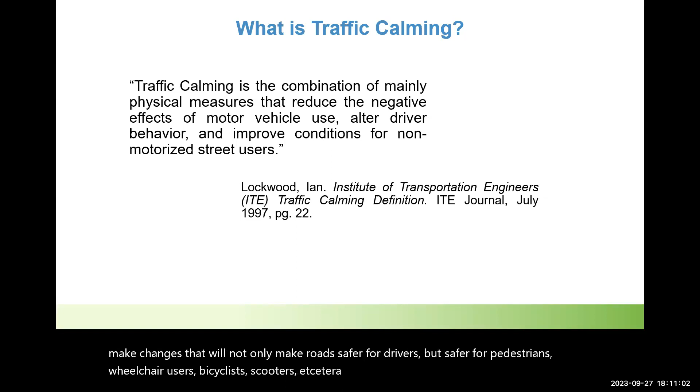Traffic calming isn't by any means a new concept. There are tons of examples all across the US, all across the world, and tons of examples in Ann Arbor — we'll show a lot of them in the slides later on. But specifically, the traffic calming program in Ann Arbor is designed to provide residents with a formal process for engaging with the city in a partnership to perform a technical analysis of traffic concerns on local streets and to explore potential solutions using the fundamentals of traffic calming.

It's a 5-step program. Wade Trim is currently assisting with step 2 through a portion of step 5. I will briefly describe each step, but there's a guidebook available online that has all the details if you have anything you want to review after the meeting.

Step 1 started with one of your neighbors acting as a petitioner who submitted a request to the traffic calming program for Bird Road between Newport Road and Huron River Drive. After defining that project area, the petitioner gathered signatures from other residents who also live within the limits.

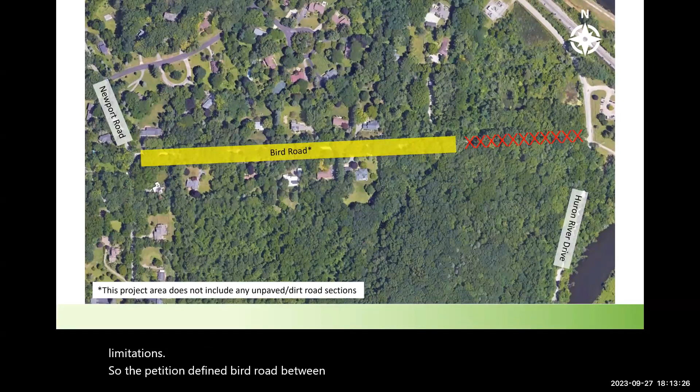I want to pause here to make sure everyone is aware of the project area limitations. The petition defined Bird Road between Newport Road and Huron River to be considered for traffic calming, but the program guide requires the existing road to be paved before any devices can be placed. So we're unable to propose changes on the portion of Bird Road that is dirt. The approximate area is shown on the map here with a red X, where the road is currently unpaved. This segment won't be part of our traffic calming discussion.

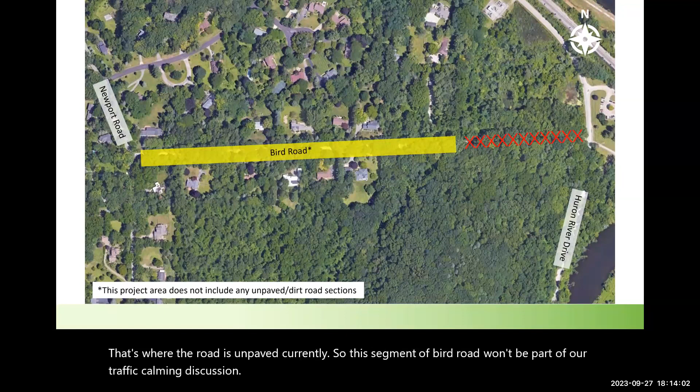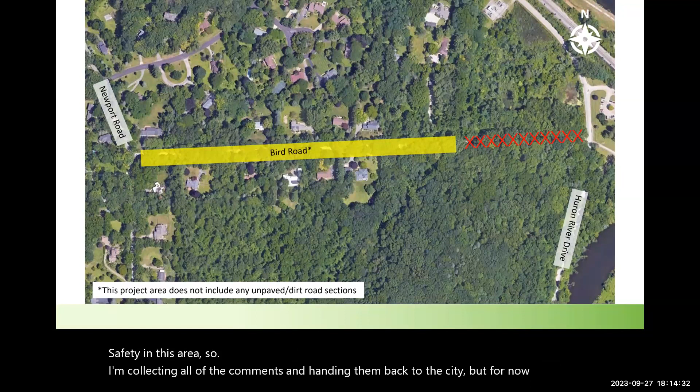There have already been a number of safety concerns in this area, even prior to traffic calming, especially at the hill right before the parking area for the nature preserve. Since Wade Trim took over this portion, we've been getting comments about safety here. I'm collecting all the comments and handing them back to the city, but for now I'll keep our focus on what the traffic calming project can address. At the end of the meeting we'll discuss any additional resources the city has.

So step 2, that's where we came in. Wade Trim sent out mailers with an initial questionnaire to all project area residents to gather feedback, specific concerns you might have, and what experiences you might have previously had with traffic calming.

The requirement for us to continue to step 3 was that at least 50% of those who participated in the questionnaire must support the project moving forward. Of the questionnaire responses we received, 82% were in favor. There's a detailed summary of the initial questionnaire on the project website.

In general, results of the initial questionnaire indicated that speeding and poor sight distances were common concerns. The starred locations show where frequent crossings are observed. Again, the map is showing only the paved portion of Bird Road. The unpaved segment between the hill by the nature area and Huron River Drive isn't currently eligible for improvements through the traffic calming program, but we'll save that discussion for the end of the meeting if there are questions.

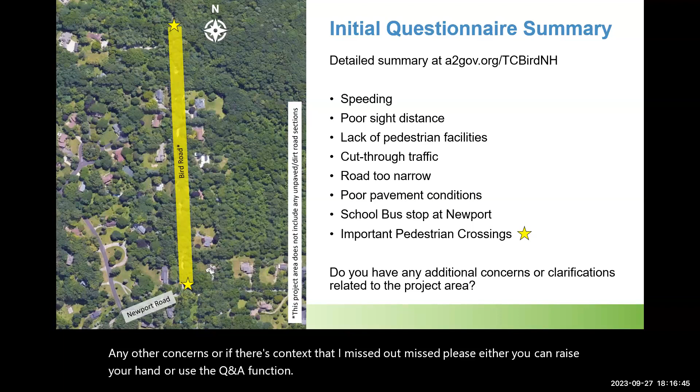I did get a question: is the lack of sidewalk considered? It'll be on one of the later slides as well, but the traffic calming program does not install new sidewalks, and won't install new sidewalk ramp connections either. The city does have a separate program for sidewalks, but the traffic calming program would not be able to put sidewalks in. This entire stretch doesn't have any pedestrian facilities, which was another big and frequent comment in the questionnaire.

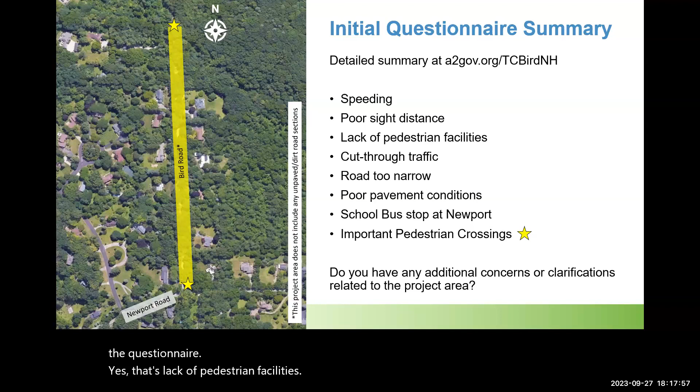Okay, don't see anything else. So step 3 is where we are today, and it's where most of our focus will be for the rest of the meeting.

Before I present the starter idea, we'll go through an overview of the device toolbox described in the guidebook. Before we do that, I'll launch another poll to check if people are familiar with the guidebook, in case they didn't get a chance to look at it. When we mailed the questionnaire out, you received a copy of the guidebook, but it was a very small copy, not always the easiest to read. There was a QR code to get you to the website for the full version, but I know there's not always time for that.

I've got all the answers in, and it seems like everyone's already looked through it. There might be one or two people who are on the verge of skimming through it and needing a refresher. But this meeting is recorded, so we will go over it quickly to make sure anyone who goes back has an easy reference.

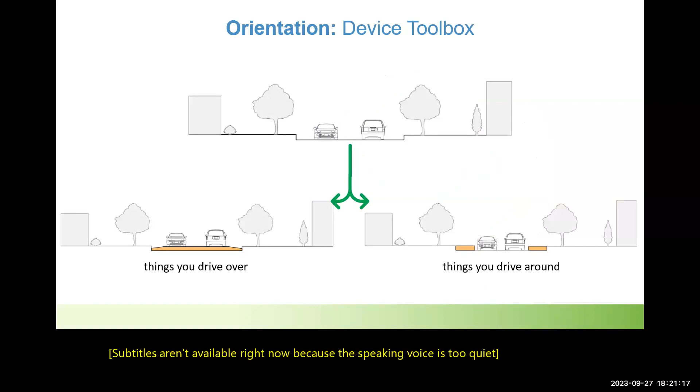On pages 9 through 12 of the traffic calming guidebook, devices are grouped into things you drive over and things you drive around. A disclaimer about this portion of the presentation: some devices in the guidebook are not covered tonight because they're not feasible for this project, either from an engineering perspective or they don't meet the Ann Arbor Fire Department's requirements for emergency access.

Things you drive over are devices that slow traffic by creating discomfort if traveled over at a speed exceeding 25 miles an hour. The device toolbox presents 4 devices that fall under this category, including speed humps, speed tables, raised crosswalks, and raised intersections.

The next few slides will describe each of these devices except for raised crosswalks and raised intersections. These devices are currently under review by the engineering department. They also don't apply with this project since we don't have any established crosswalks.

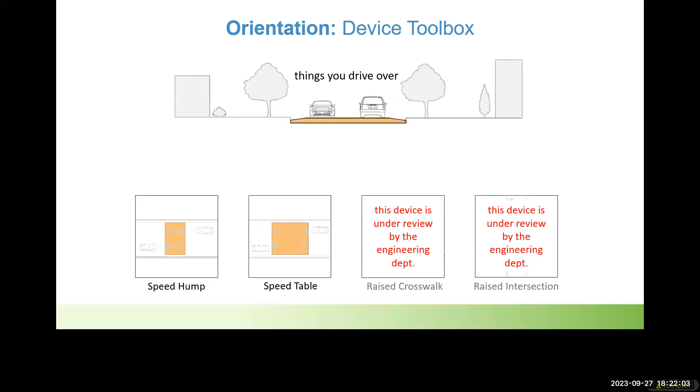Studies found benefits of speed hump treatments include speed reductions, traffic volume reductions, as well as crash reductions. Some other notes: the height is designed for ease of bike usage and bicycle safety. If previously permitted, vehicles can park on speed humps and trash cans can be placed on speed humps if necessary.

This is a speed table. You can see a fully constructed example on Glenwood Road near Washtenaw Avenue. Speed tables are raised devices that extend the full width of the street except for the gutter. They're typically 22 feet long with tapered edges, a flat 10-foot center platform, and are 3 inches high.

Studies found benefits of speed table treatments may include traffic volume reductions and crash reductions. Some other notes regarding speed tables: the speed reduction is less than the speed hump, the platform width can be customized, and the height is designed for ease of bike usage and bike safety. If previously permitted, vehicles can park on speed tables and trash cans can be placed on speed tables if necessary.

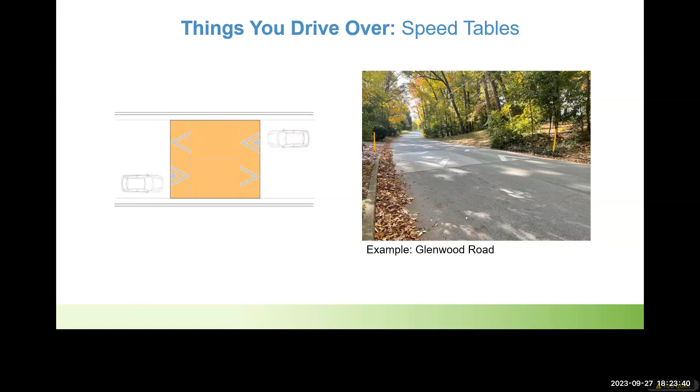If there are any questions about devices you drive over, please raise your hand or use the Q&A function. Okay, I'm not seeing any questions or hands.

Moving on to the other group of devices in our toolbox, the things you drive around. This type of device slows traffic by creating the perception of less room for error and a road that's visually or physically narrower. The device toolbox presents 7 devices that fall under this category: pedestrian gateways, median islands, pedestrian islands, residential traffic circles, mini roundabouts, curb extensions, and chicanes.

The next few slides will describe each of these devices except for the devices marked in red. These devices have been omitted from this project due to the street width requirements set by the fire department, as well as conflict with existing traffic controls.

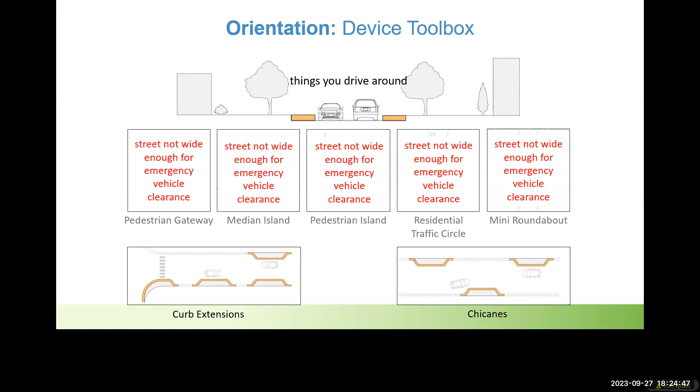Curb extensions can be used in several designs: curb bump outs, mid-block bump outs, and chokers. Shown on the right is a bump out at Granger Avenue and White Street. The curb extensions act as an extension of the curb.

Oh, sorry, I think we lost Lori. I'll go ahead and pick up.

Curb extensions act as an extension of the curb line to physically and visually tighten the corridor by narrowing street width. Two parallel curb bump outs can be used to create a single lane width passageway or choke point. You can alternate the curb bump outs to create a chicane effect.

Curb extensions have a couple of considerations: they may require drainage consideration, they may require loss of on-street parking, they can also cause debris to collect around the device, and they also have to maintain 20 feet for emergency response vehicles.

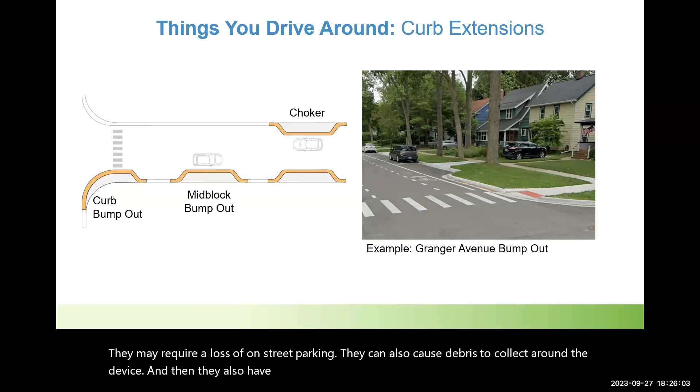If you're doing a 1 or 2 lane choker, this can result in speed reduction. It's shown to produce a minor reduction in traffic volume, and 1 lane chokers rely on regulatory signing and driver courtesy as well.

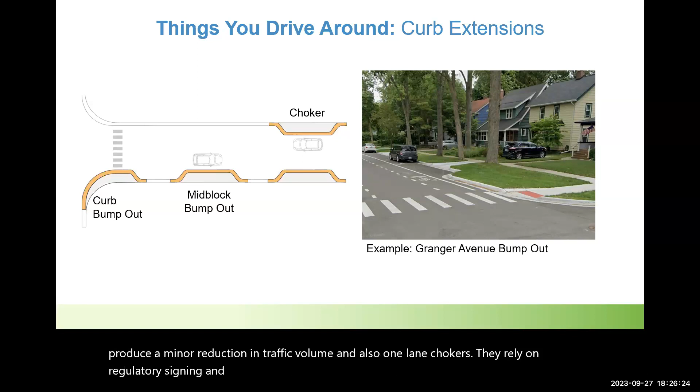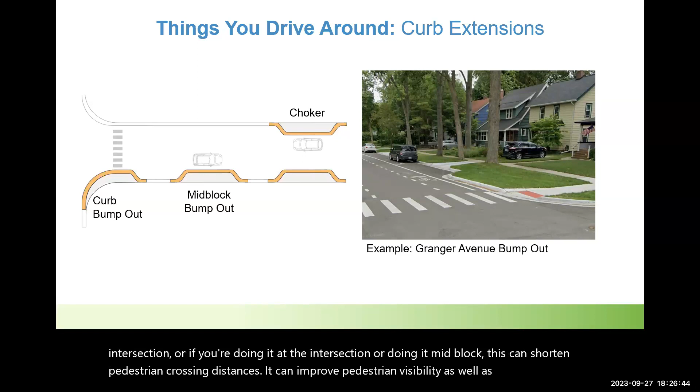Devices applied at intersection and mid-block locations. Whether at the intersection or mid-block, this can shorten pedestrian crossing distances. It can improve pedestrian visibility, as well as eliminate illegal parking if there was none permitted on the street.

This slide shows an example of alternating curb bump outs that create that chicane effect. Like other curb extensions, chicanes can require drainage consideration, loss of on-street parking, and cause debris to collect around the device. They must still maintain 20 feet of clearance on the road for emergency response vehicles.

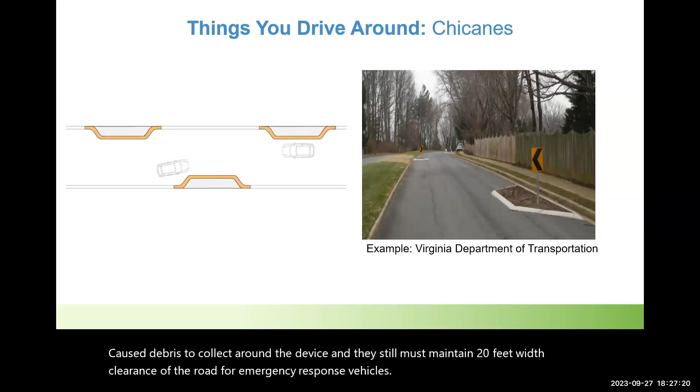There's one other device included in the guidebook that doesn't fall into the category of driving over or driving around. This is the neighborhood gateway treatment. It's a physical landmark that indicates a change from a higher speed arterial road to a lower speed residential or commercial district, like a sign saying you're coming into the neighborhood.

Neighborhood gateway treatments can increase awareness for residential speeds. They may also require additional right-of-way. In addition, the neighborhood or any adjacent property owners would bear the landscaping, installation, and maintenance costs.

If there are any questions about the devices you drive around or the gateway treatment, we'll do another pause here. You can raise your hand or use the Q&A function.

Hi Christy, this is Cyrus. Oh hey Cyrus, sounds like just a few connection issues. I noticed I got a warning, and I think Lori might have hit an issue a bit ago. But the last bit you were explaining about that last device, the gateway treatment, it cut out for a second for me. I'm not sure if that's the case for everyone else, but just wanted to flag it in case it's my connection. Oh no, you're good, thank you. I appreciate that.

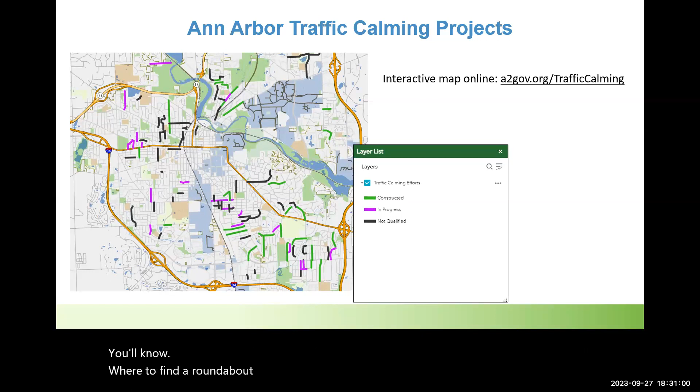There were examples of those devices in Ann Arbor next to all the device descriptions. If you'd like to see additional examples of how the devices are used, there's an interactive map on the traffic calming website showing past and current projects and where they are located, so you can even visit them in person to find a roundabout or a curb extension.

Next we'll present the starter idea, a draft plan created based on engineering judgment, data collection, the preliminary traffic study, and feedback from the initial questionnaire. There will be an opportunity to ask questions on each device and discuss any changes you'd like to see, keeping in mind this project is limited to the devices just reviewed, subject to additional design, and limited to only the paved portion of Bird Road.

So this is the starter idea. Again, this is just a draft created based on the information we've gathered so far, preliminary information, and the stuff from steps 1 and 2. We're proposing four devices for Bird Road. They're all speed humps, spaced to work together to create a traffic calming effect throughout the paved portion.

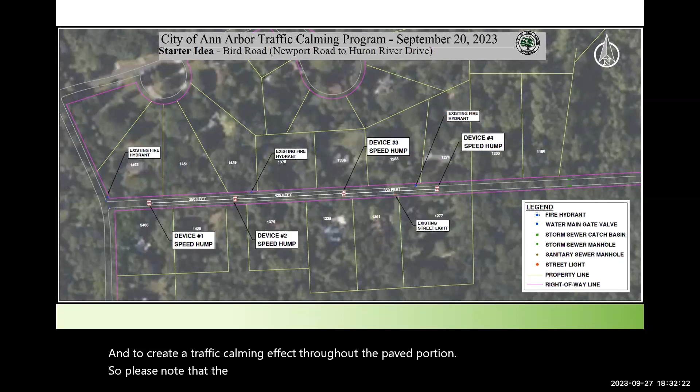Please note that the traffic calming guidebook states that the street must be paved to be considered for traffic calming. We've got about 2/3 of the road that we can work with between Newport and Huron River Drive.

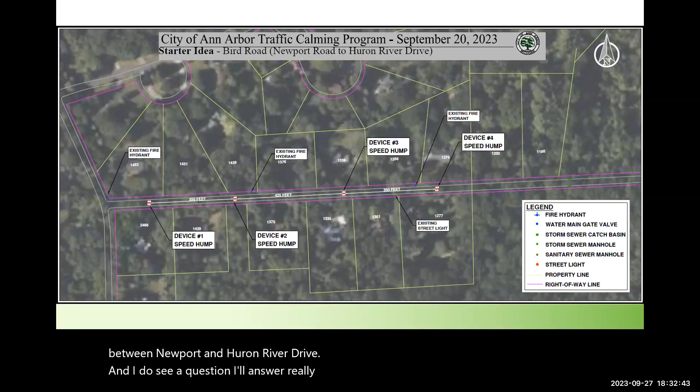I do see a question I'll answer really quick. There's a question about speed limit signs. Those unfortunately are not part of the traffic calming program, that's not something we can implement. Cyrus, correct me if I'm wrong, but I believe the city does not typically install new speed limit signs in residential areas.

Yes, that's correct. We can certainly take a look about if there is a lack of signage. What we've typically found in other locations is having some awareness of the speed limit is obviously important, but relying on signage alone is where the traffic calming program comes in, which is intended to create the slowing of traffic through a physical design change. It doesn't mean we can't install a speed limit sign if there isn't one on the block, for instance. But I believe there is, I'm just double checking. As long as there's some signage, that's generally sufficient.

What we're finding it can kind of— sorry Cyrus, you're coming in a little— is it breaking up a little bit? Yeah, okay. Can you hear me now? I think I'm good now. Sorry about that, yes I can hear you, okay. Lori, okay, I'll hand off to Lori then, because I think she'll reiterate what I was saying.

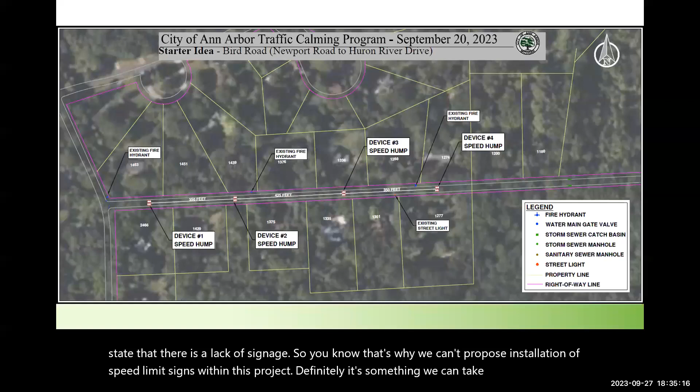Thanks, Lori. I already cleared it, I think, from the Q&A board, but they did state there is a lack of signage. So while we can't propose installation of speed limit signs within this project, definitely it's something we can take back to the city at large to review and determine whether the lack of signage itself needs to be addressed. I'll try one more time.

If hopefully this will come through. Can everyone hear me okay? Yeah, I can for now, yeah. Okay, just let me know if that's not the case.

So everything Christy and Lori said is correct. That being said, now that I've pulled the map up, I do see that we don't have signs, which may be a result of the fact that we don't have a good place to actually install them. I'll certainly work with our team to figure that out. As Christy said, it wouldn't be part of traffic calming per se, but having one set of signs on this block would certainly be a reasonable reminder of the speed limit. But we need to make sure that we can actually install the sign somewhere, given that there's no sidewalk and there may be limited ability for that.

Also just as a reminder, signage alone is typically not a solution. We don't rely on signage alone because we know, based on a number of studies on various types of behavior, not just speed limit, that installing a sign by itself is really just part of informing drivers and other users of the street about certain pieces of information. We would expect that if traffic calming were installed as part of this program, that would have a much more noticeable effect on bringing speeds down.

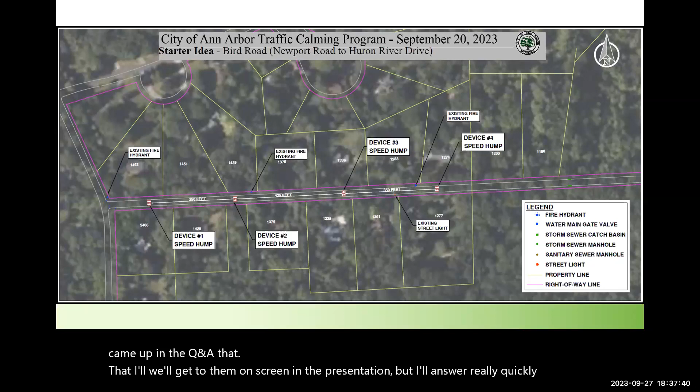Thanks, Cyrus. Yeah, so we'll definitely take that back for review outside of the program. There are a couple other questions that came up in the Q&A that we'll get to on screen in the presentation, but I'll answer really quickly. There's one from Nina asking if one of the speed humps looks like it's right in their driveway. Is that correct? This is just a very general overview, a very high level plan for you to look at.

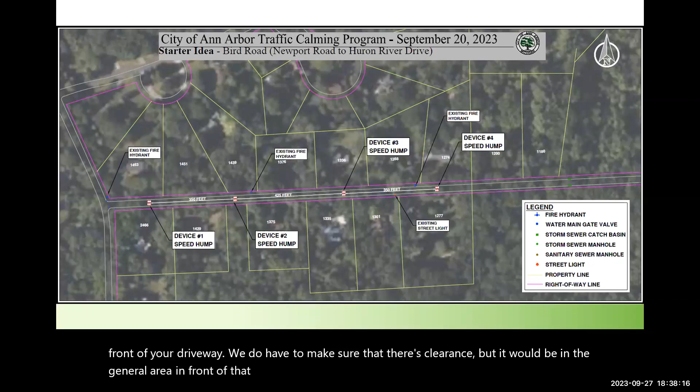I've already been out to Bird Road just to make sure we have the general spacing. It's not going to be right in front of your driveway. We do have to make sure there's clearance, but it would be in the general area in front of your address.

The other question that was added: what information do you have regarding sound issues and speed humps? Trucks barrel down this road at a high speed and wake me up at night. Would the humps make it worse? If you're speeding over the humps, I believe that would definitely create sound. That may end up being an issue of enforcement, which is something the police department can address, and I have more information on that later in the presentation.

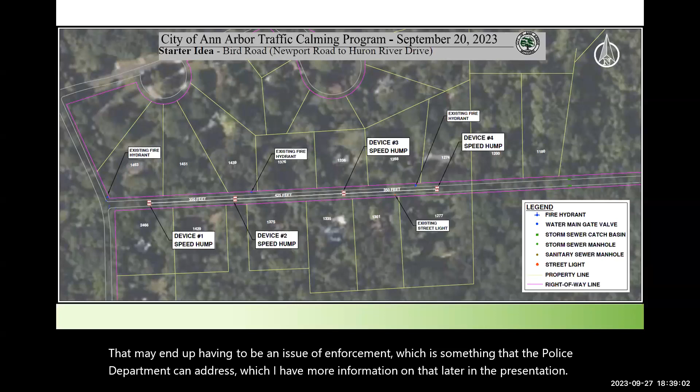One thing with speed humps and trucks is that it's going to be hard for them to continue speeding over them. Trucks in general are just kind of noisy. This question came up in another one of our meetings too, and so far the city hasn't heard any complaints of it increasing the speed or the noise levels. That's correct, Cyrus? Yes, that's right, we have not heard that. But you're right, and you and Christy are both correct to note there could be a sound issue if vehicles continue going over them at higher speeds than designed. But we have not heard of that as an issue after project installations.

One last comment came in before I go on, noting that the fire hydrant near 1274 is marked incorrectly, that it should be within the property line of 1274, so we will adjust that. Like I said, it's a very high level drawing that you're looking at. That is important to note.

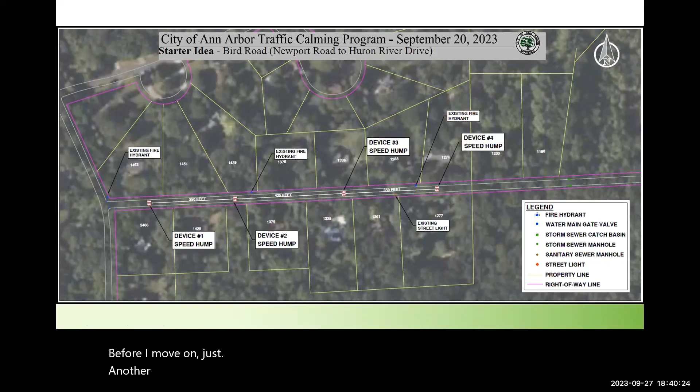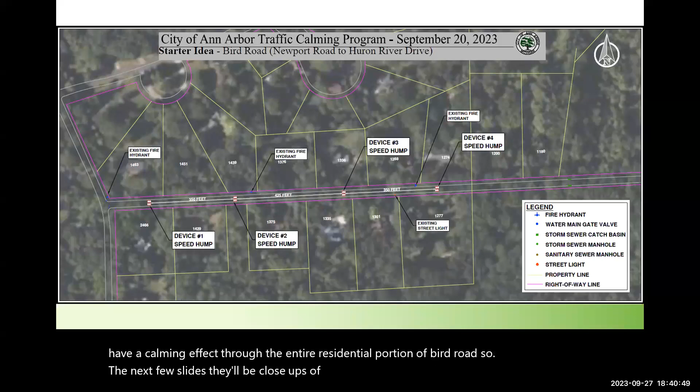Before I move on, just another reminder about speed humps. Speed humps, raised devices or traffic calming devices in general, are most effective when used in a series. We wanted to use this as a starting point. A layout like this is nice because it shows you can have a calming effect through the entire residential portion of Bird Road. So the next few slides will be close-ups of each device, just blowing up the image in smaller portions for you to look at. It's a very high level drawing, it's not going to have all the details as they would in the final engineering or construction plan, but just forewarning you, because they're all speed humps, the next few slides might get a little repetitive. This image here is just a little too far zoomed out to see some of the detail.

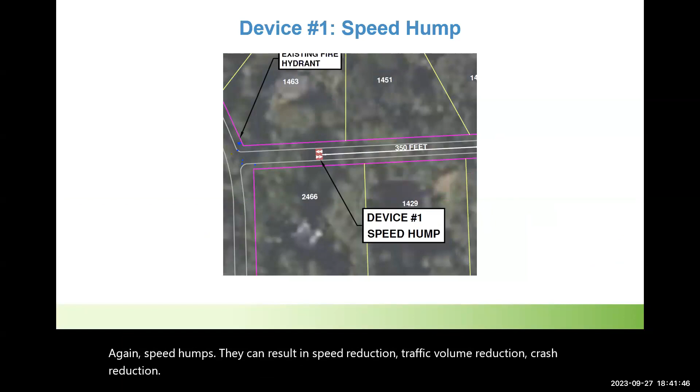So device number 1 will start at the west end over by Newport Road. Device number 1 is a speed hump near 1463 Bird Road and 2466 Newport Road. Again, speed humps can result in speed reduction, traffic volume reduction, and crash reduction. Some things to keep in mind: legal on-street parking is still permissible over a speed hump. These are designed to a city standard to be safe for vehicles and bicyclists to travel over. If there's any questions on speed humps, or on this device specifically, go ahead, use the Q&A or raise your hand. I'm not seeing anything.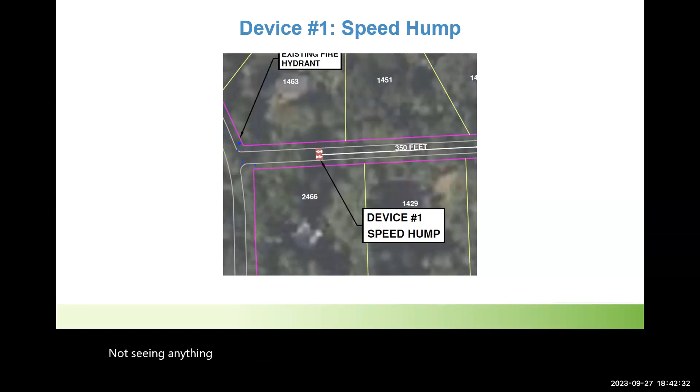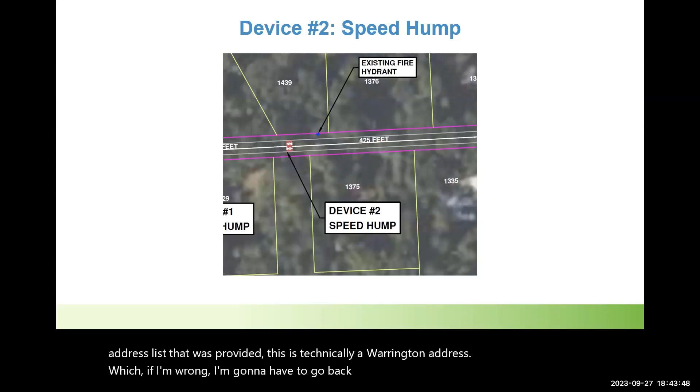There's a question: is this on Warrington or Bird? This is on Bird Road, but from the address list I was provided, this is technically a Warrington address, which, if I'm wrong, I'll have to go back to the address list. The address I was provided was that this property, even though it faces Bird, was considered Warrington. Yep, that's right. Just for clarification, it may be helpful for residents of Bird Road to think of it as which Bird Road addresses it's between: it's between 1429 and 1375. Thank you, okay, someone back that up too -- this is the back of the Warrington Circle property. Thank you.

If there are any questions about device 2... Oh, it is also a park access site there as well. Okay.

If there are any questions about device number 2 before we move on, go ahead and either raise your hand or use the Q&A.

There's a comment that no one uses the park access, and there's no trail there.

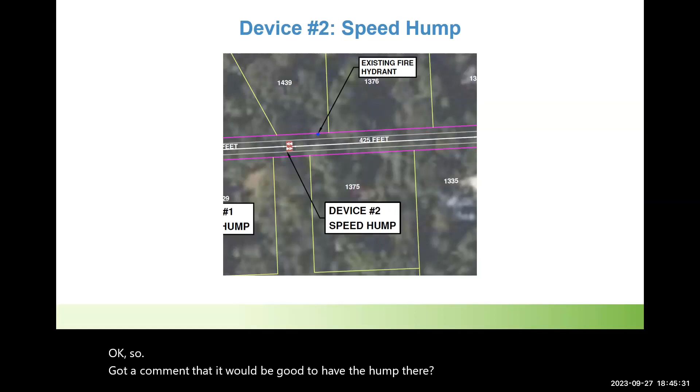We'll move on to the third one. Device number 3 is near 1335 and 1336 Bird Road.

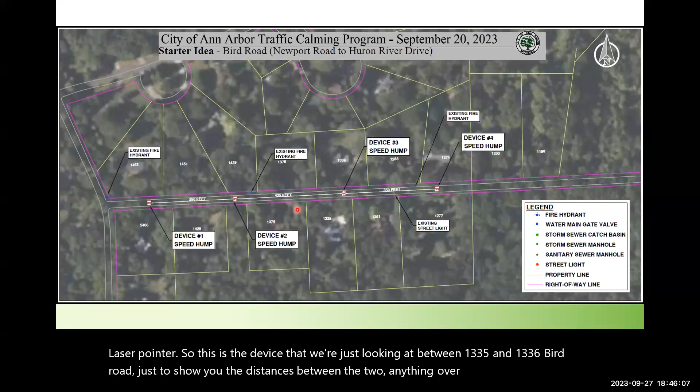I'll go back really quick to the high level view. So here's my little laser pointer. This is the device between 1335 and 1336 Bird Road. Just to show you the distances between the two, anything over 500 feet we start to question whether it's too far apart to have a device. But anything under 200 would have us questioning the opposite — are these devices too close together? So we're within range between all the devices.

They're not going to be exact — this isn't going to be exactly 350 feet from device number one, but that's okay. We've got driveways and fire hydrants we have to work around, so we have some room to move them. They don't have to be exact. Even with this drawing, if this is what we end up installing, it will not exactly be 350.

Okay, and then it was also brought up that device two — this area here — is just park property. There's no trailhead there.

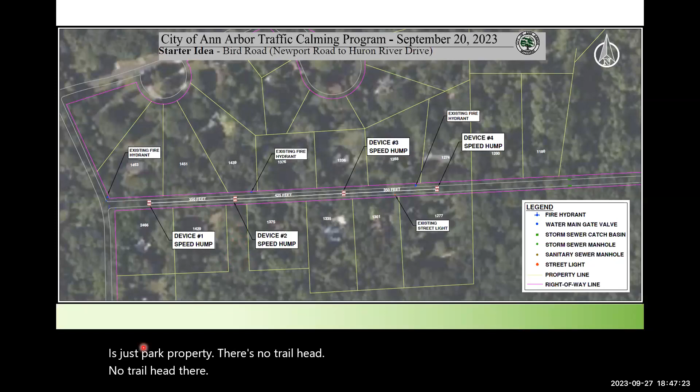And last, another question: why are there no devices around 1200 and 1160? So why are there no devices over here? This is where that very steep hill is, and this is where it transitions — the pavement conditions transition into dirt down at the bottom here.

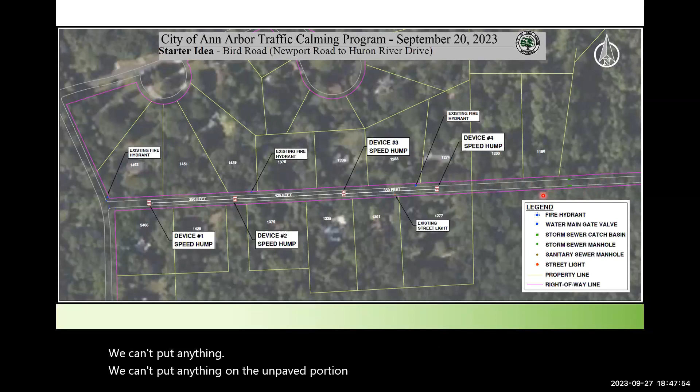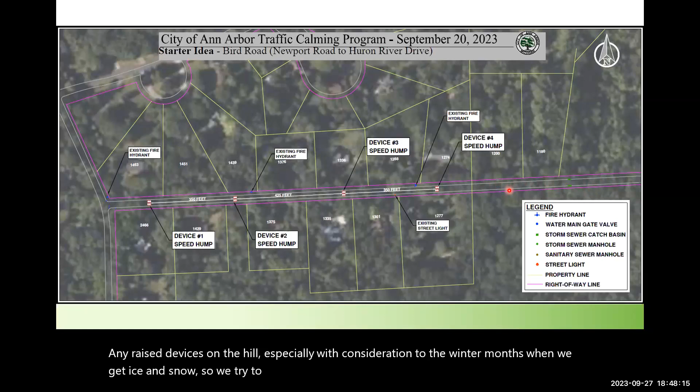We can't put anything on the unpaved portion. And with the hill there, in previous projects we've had a lot of pushback on placing any raised devices on a hill, especially considering the winter months when we get ice and snow. So we try to avoid putting devices on the hill as well. But because we have a device here, we know that we can experience traffic calming even beyond the device.

And I'll go back to device three. Again, this is 1335, 1336, speed hump. If there are any questions about this one before I move on to the next slide.

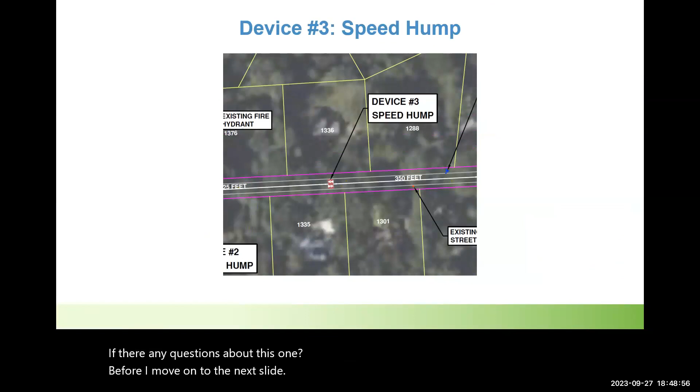I don't see any. So, device four is near 1274 and 1277.

With clearance, there will be clearance from driveways and from the fire hydrant. I will update that graphic to show that the hydrant is within the 1274 property line.

Again, as I said, beyond that, over towards 1200 and 1180, we can't really put any devices there. With the transition to the unpaved portion, with the hill there, with our limitations because there aren't any sidewalk facilities for us to work with, we're kind of limited.

The only other thing, especially with speed humps, because of the ice and snow, and especially with how steep that hill is, the concern would be if vehicles would have a hard time getting up or down that hill in those months.

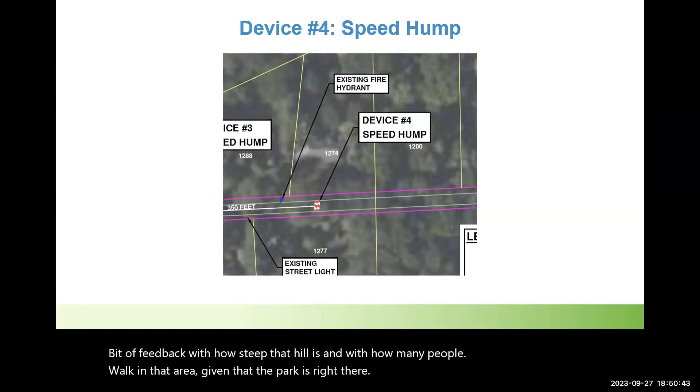I understand that it was a very common bit of feedback, given how steep that hill is and how many people walk in that area, given that the park is right there. I don't want to say that it's entirely out of the scope of this project.

The only other device we really have that applies would be the curb extension. But even that — if we can't maintain clearance for emergency vehicles, we cannot put anything there. I believe the road is under 30 feet in width, maybe 27 or 28 feet.

Maybe even more than that. Yeah, it looks pretty narrow measuring it on Google Earth. In some areas it's about 23 feet. There's so many trees it's hard to measure. But I was thinking about this, even if there's nothing on the unpaved portion, it's gonna deter people. And thinking about the truck comment too.

The good thing about the way these devices have been designed is with four speed bumps closely spaced like this, it's really gonna be difficult for trucks, so difficult that they're probably not gonna come down this street if they know about the speed humps. And I think it'll definitely slow down the traffic significantly.

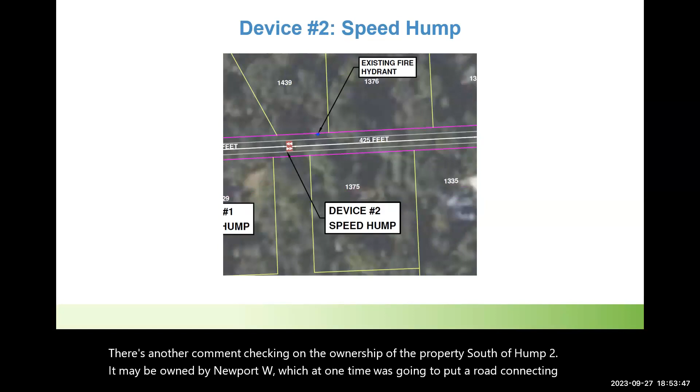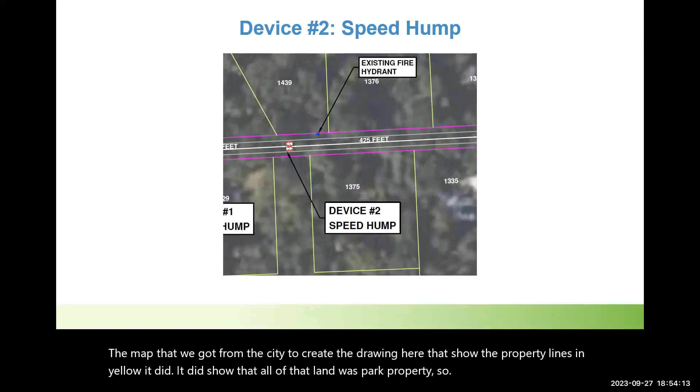But there's another comment checking on the ownership of the property south of Hump 2. It may be owned by Newport West, which at one time was going to put a road connecting Newport West to Bird. Okay, thank you, that is good information to have. The map we got from the city to create the drawing showing the property lines in yellow did show that all of that land was park property. So that will be good for us to double check to see if there's anyone else to potentially collaborate with on our design.

So I hope that answered or gave explanation on why we don't have any additional devices beyond device number 4. Okay, that is all. So it seems like we're going back and forth a little bit, but I appreciate the input from everyone. If there's any other questions about these devices, why we've chosen them, why we're limited to these raised devices, or why we're spacing them like this, or if we'd like to see anything else, I'll pause here for a minute, because the next section is going to be more polling on each of the devices. So I want to try and get any other feedback or questions addressed before moving on to the polling.

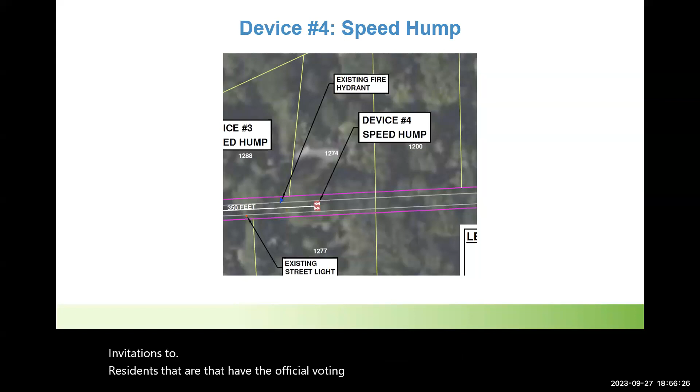You don't see anything. I'll remind everyone that the invitations for this meeting were sent out to the residents, but the meeting information was also posted to our public project website. So this is a public meeting that anyone can attend. We just try to direct our invitations to residents that have the official voting power on the project, but these meetings themselves and this polling are public.

So I didn't see any other questions or comments about the devices themselves. So the next few slides will just be poll questions for each device. And before I move on to that, I want to point out there are some neighbors who couldn't make the meeting today, but they've reached out to us ahead of time and shared input that I want to share with everyone before we do the polling.

So I had a resident who reached out, and in common with a lot of the other discussion we've had, said that the real issue with speed is at the park area with the hill, with the narrowness of the road. They cited it's really dangerous for walkers and bikers when cars are driving really fast. They also recounted a near miss, where they were driven off the road by a speeding car while riding their bike. They also stated that given the city is only looking at the paved portion of the road, they didn't see how that addresses the real issue.

They wanted to put up speed limit signs, but given that we can't do that within the limits of this project, they weren't sure what benefit there was to this exercise. The road is pretty narrow already. They stated that they believe the speed bumps are too noisy. Really the only thing they supported was putting up a speed limit sign on the paved portion and on the dirt road portion. So I wanted to make sure I shared that with everyone. If there's any feedback, I see I have a hand raised from Margot. Go ahead and unmute.

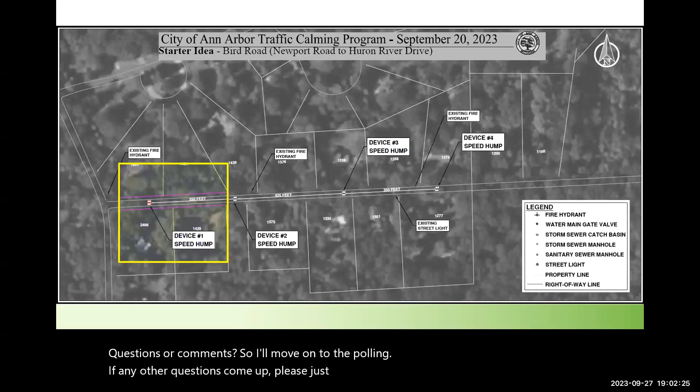I didn't see any other questions or comments, so I'll move on to the polling. If any other questions come up, please keep doing what you're doing with the Q&A and hand raising. I'm going to launch the poll for device 1.

It's asking, do you support device 1? That would be the speed hump near 1463 Bird Road.

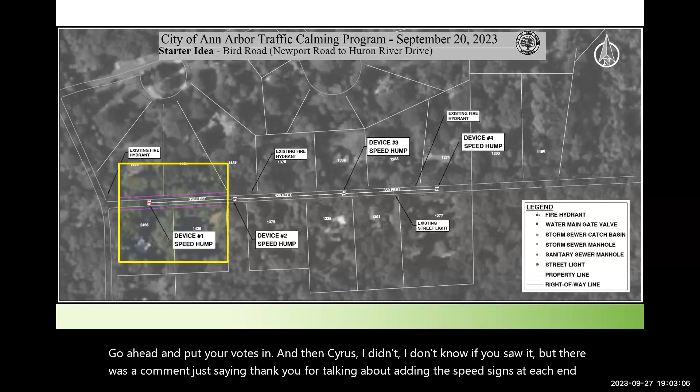Go ahead and put your votes in. Cyrus, I don't know if you saw it, but there was a comment just saying thank you for talking about adding the speed signs at each end of the road, if not just for residents, but for all people who come to the park. There is that. Thanks.

There was another question: why are speed humps preferred to speed tables? With the studies that we have, there are slight differences in the percentages of reductions from the studies that are out there. But in general, you're likely to see or experience more of a stopping effect with the speed hump than the speed table. The speed hump has a different feel to it.

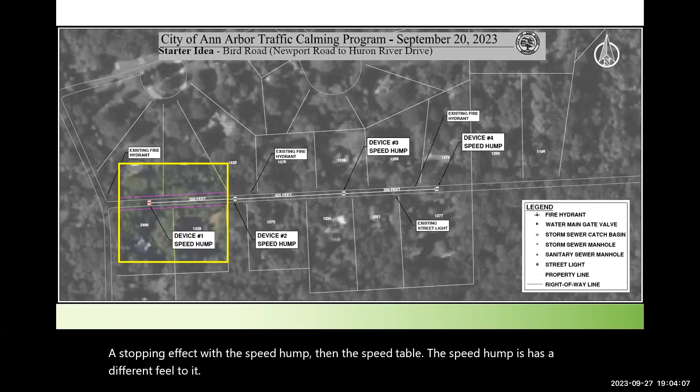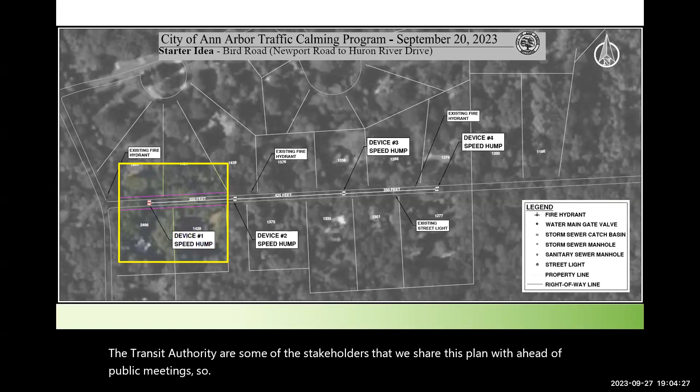Speed tables, we start to look at those when we know there's an established bus route or a lot of bus traffic. The public schools and the transit authority are some of the stakeholders we share this plan with ahead of public meetings. So when we've got a bus route or we're right next to a school, we like to share that with them. I believe we haven't had to do it yet, but I know the preference at that point would be a speed table rather than a hump.

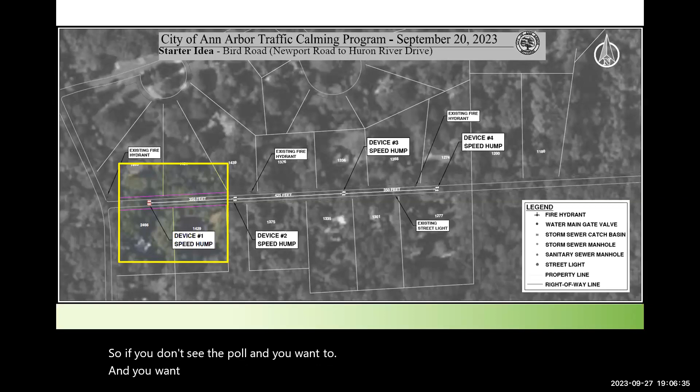The question is asking, do you support device number 1, the speed hump here near 1463?

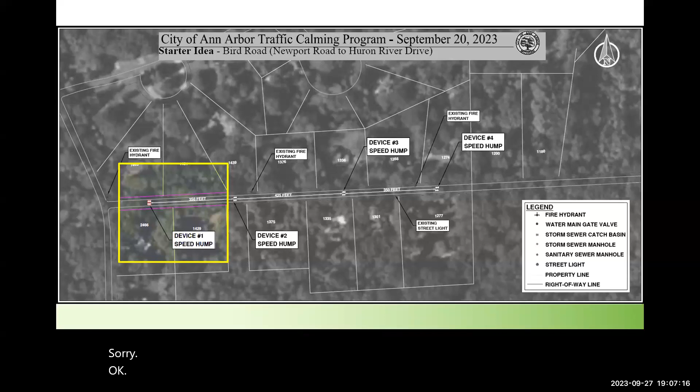Okay, I got that person's response in with the Q&A. Thank you, hopefully with the next one you can see it. So including the typed in question, we do have full support for device 1.

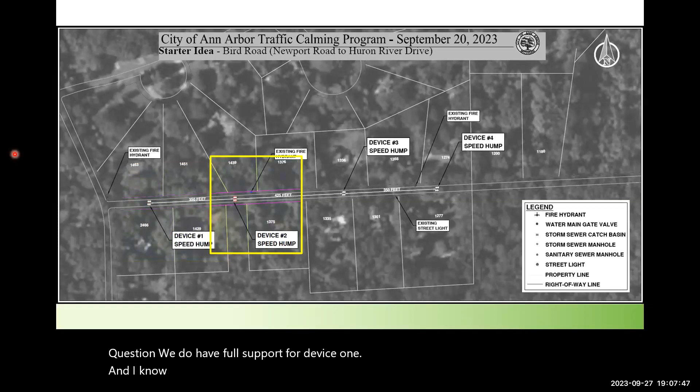And I know this polling can be kind of limiting, so if there's any other context that you want to add, feel free to speak up and share it, or use the Q&A, because I know a yes or no isn't always the best way to share your information or your opinion. But I'll go ahead, hopefully everyone can see this.

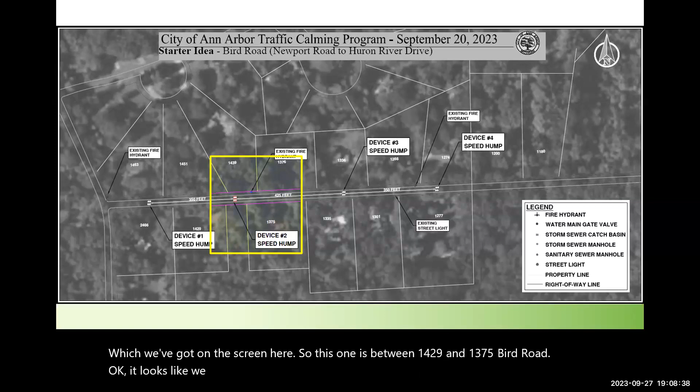I'm launching the next poll question for device number 2, which we've got on the screen here. So this one is between 1429 and 1375 Bird Road. Okay, it looks like we have everyone answering on the polling page, so we're all in support of that.

And then the next one is for device number 3. That poll will launch right now. And if there's any feedback that you want to share anonymously, just a reminder, you can use the Q&A and check the anonymous box if you prefer that. If there's any other feedback or any other yes-but that you need to add.

So for this one, we do have at least one vote for not supporting this. And if there's a specific reason why, or if there's anything that we could change that would gain support, that would be really helpful to learn. Like I said, even after this meeting, if there's any other feedback you want to provide, you can send it to me.

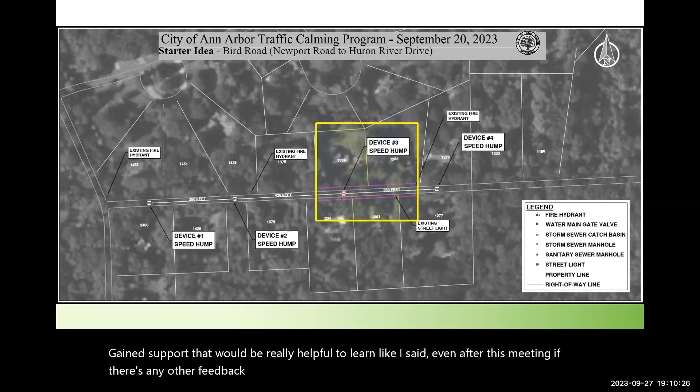But we'll do the polling question for the last device. So this is device 4, and I'm launching the poll question now. This is the speed hump near 1274 and 1277.

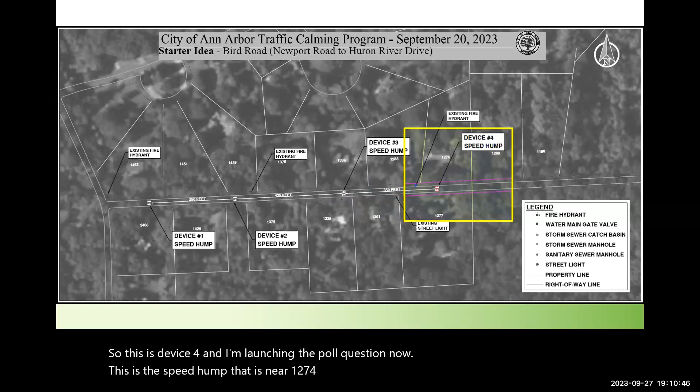There was a comment that popped up with the concern that this would cause the city to deny sidewalks and other help near the dirt road or the dirt portion.

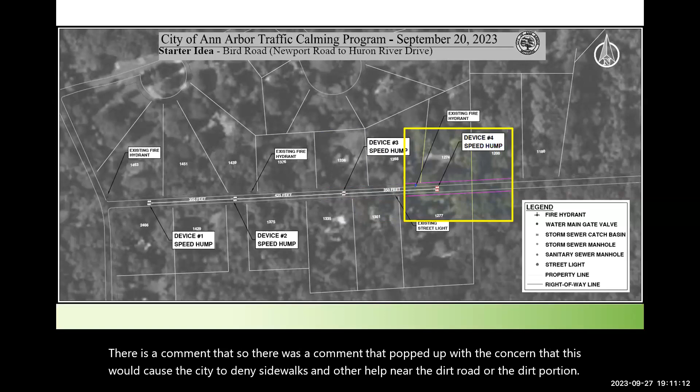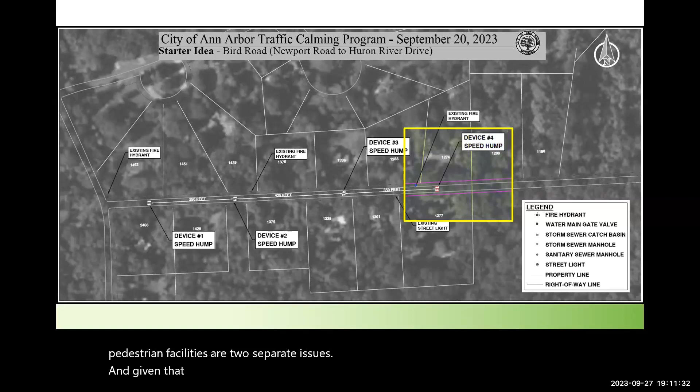I would say, perhaps if Cyrus has additional context, I would say that these are two separate issues. Speeding and lack of sidewalks or lack of pedestrian facilities are two separate issues. And given that the safety concern predates the traffic calming program, it would not be my first thought that the devices implemented here would deter any future help or future improvements to Bird Road.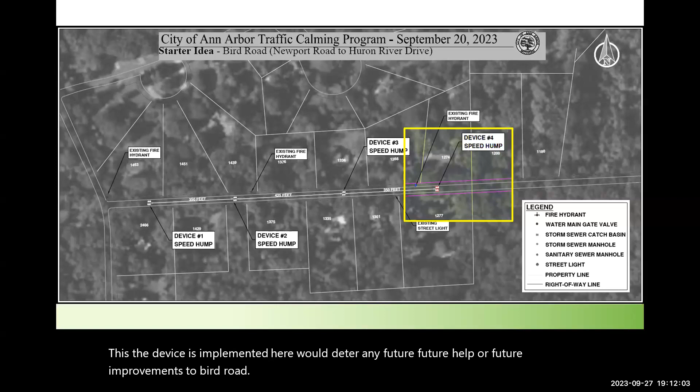Yeah, that's correct in a nutshell. The existence of traffic calming devices shouldn't have any impact on future potential sidewalks. The bigger issue, as I understand it right now, is the unpaved portion. I don't know, yeah, it's a separate question and process. But I think the short version is that whether it involves potential paving of the unpaved portion or sidewalks, both of which there are not plans to do right now.

But if there were future plans to do either, the traffic calming devices would not be an inherent roadblock. There may be a chance to revisit the traffic calming devices if they're installed and determine if there's any changes that need to occur. But yeah, it's not a reason to vote against the traffic calming device because of the sidewalk question. They are pretty separate issues. Thanks, Cyrus.

And then there's a couple more comments that came in. One notes that they believe the street is not wide enough to install sidewalks, and they're stating they personally don't want trees cut down and are focusing on calming traffic. So I appreciate the respectful viewpoint.

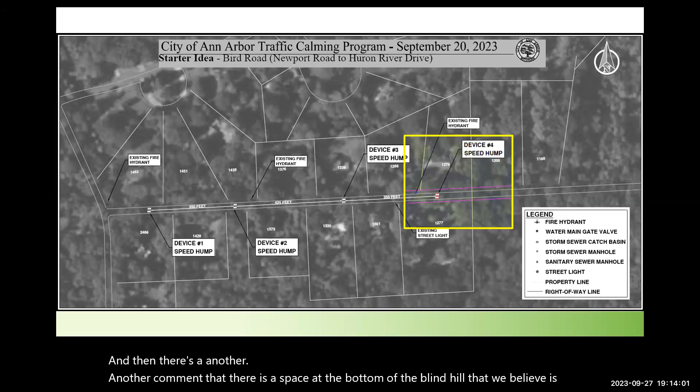And then there's another comment that there is a space at the bottom of the blind hill that we believe is still in the city. Could you put a hump there? So at the bottom of the hill, where the pavement starts to get really not great, where it transitions into dirt, I don't know if it would be a pavement condition issue.

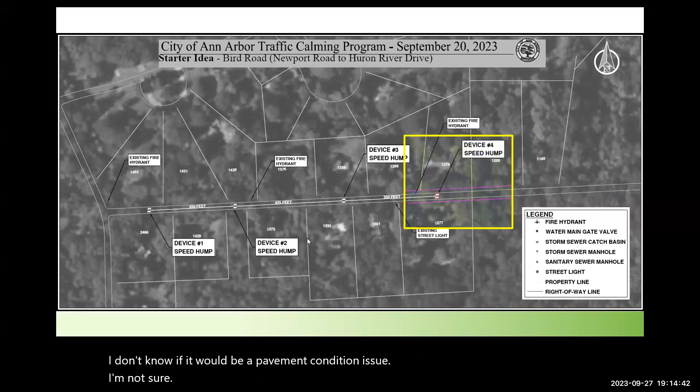I'm not sure if that's where it meets the dirt. Yeah, at the bottom of the hill where there's a parking area for the nature area. Look at the Google Earth. I think that's within close proximity of your other device, number 4.

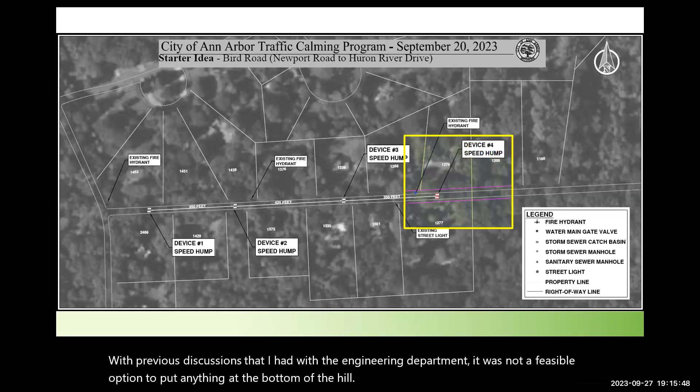And also we've got another driveway that's right at the bottom of the hill. I don't want to discourage placement there if it makes sense or if it's feasible, but with previous discussions I had with the engineering department, it was not a feasible option to put anything at the bottom of the hill. Let me save that as an issue to follow up with and give you a firm answer in the discussion summary.

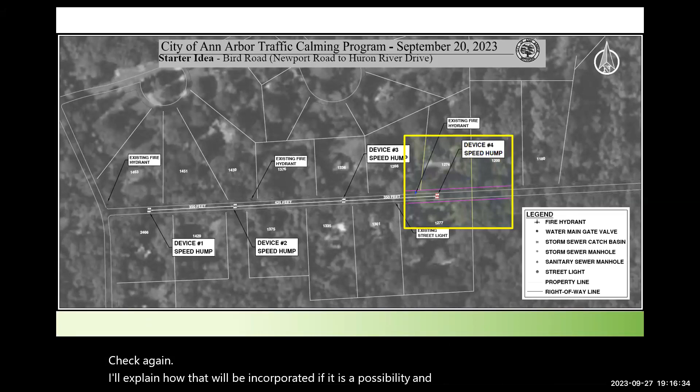Because I always like to double check, sometimes triple check on things. And if I recall correctly in previous conversation with the department, they preferred that we just avoid placing any devices near the hill because of the transition, since the pavement is so poor. But I would like to go back and check again. I'll explain how that will be incorporated if it is a possibility in the next slides. So yes, putting a pin in adding a hump at the bottom of the hill.

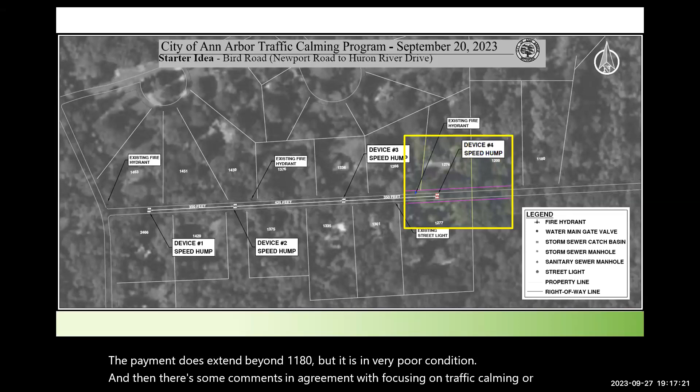And it looks like we've got some additional comments backing that up, agreeing that this is an area that definitely needs calming. The pavement does extend beyond 1180, but it is in very poor condition. And then there are some comments in agreement with focusing on traffic calming, reiterating the comment with agreement on the note written by the neighbor who couldn't attend, that the issue is pedestrian safety, visibility, and vulnerability there.

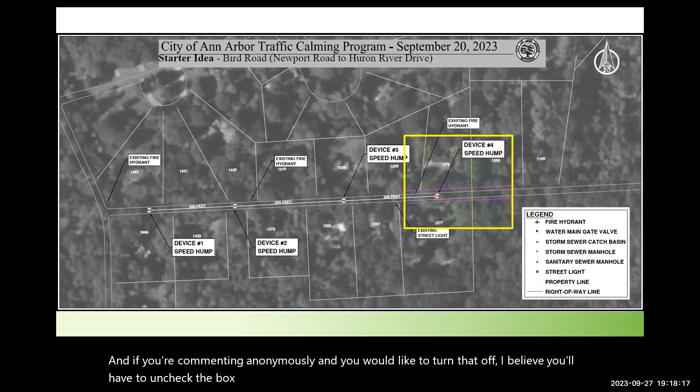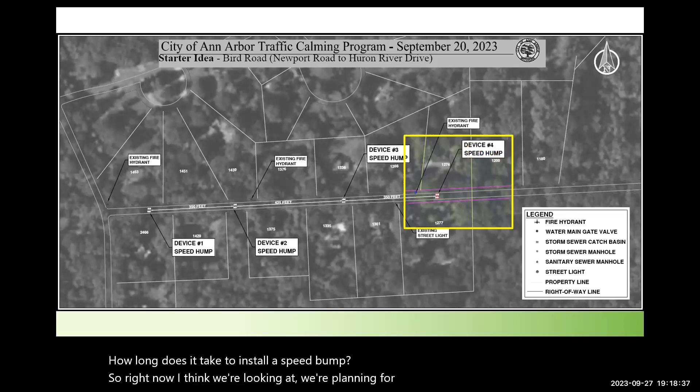Question: if this plan for speed humps is approved, when would installation actually begin? How long does it take to install a speed bump? Right now I think we're planning for budget in the 2024-2025 season at this point. Once we get through this process, I don't know if that's still the case, if it would still be part of that budget.

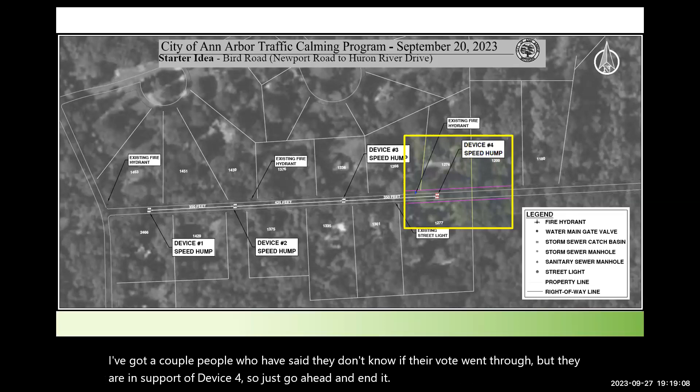Okay, I've got a couple people who have said they don't know if their vote went through, but they are in support of device 4. So just go ahead and end it. It looks like we're in support of device 4. We are potentially in support of a 5th device, another speed hump at the bottom of the hill. But as I said, that's something I'll have to confirm whether or not that's a possibility for us, and then follow up with everyone.

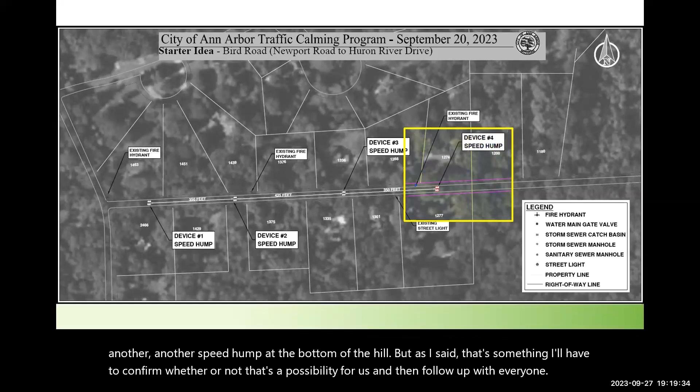So that's it on the polling. The next step, over the next couple weeks, we'll post today's presentation and the recording to the project website. I'll also post a summary of the polling results, and we'll use the feedback to create the preliminary plan. Along with that summary will be a discussion section where I will have a definitive answer on whether or not we can add a 5th device, or whether or not we can add a device on the other side of that hill over by the parking area. It sounds like that would be the preferred location, over by the parking for the nature area.

After that, the next step will be meeting number 2. Meeting number 2 consists of 2 parts: a self-guided tour and a Zoom meeting. That meeting is scheduled for November 16th.

I want to apologize because the letter that I sent out to everyone states that the meeting is on a Monday, November 16th. The 16th is actually a Thursday, so the calendar date was correct, I just typed out the wrong day of the week. The save the date card that was enclosed and posted to the website has just the date, November 16th, so that is correct. It was just an error in the letter I wrote in the mailer, so wanted to point that out.